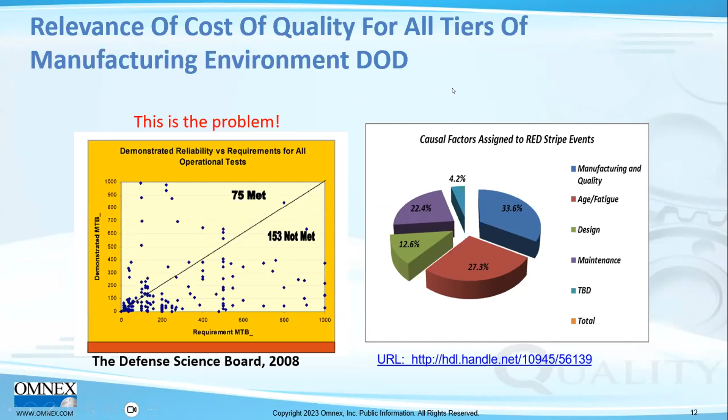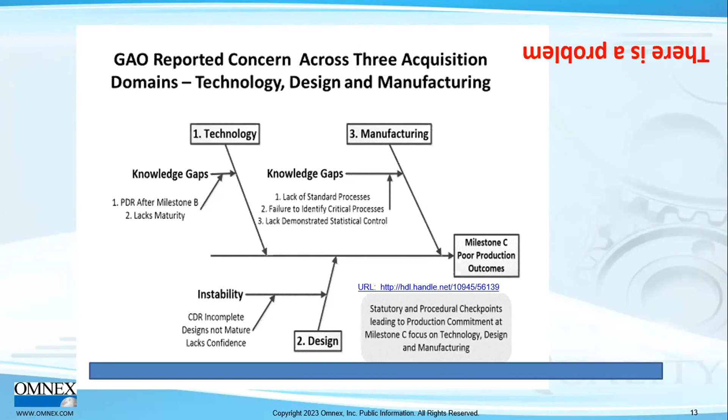It's just not mature. It's not data driven. It's a risk-evaluated system. So in my thesis, I decided to look at these three areas and focus on what's called knowledge point 3. You'll hear these terms if you're involved in contracts and in the product development cycle.

You may hear these KP1, 2, and 3 - they're metrics on how you look at the success of a program, trying to come up with metrics. And I focused on what makes the right approach to milestone C, a goal where you can start production with some know-how.

My findings, through working with at least 5 major defense primes and over 100 suppliers doing manufacturing readiness assessments, showed there was no eye on advanced quality planning or knowledge of the development of the production process.

We call that development cycle EMD, engineering and manufacturing development. But I challenge anyone - and you can email me back or try to reach me - is it the rule or is it the rarity that manufacturing development has knowledge that they can make more than 2 in a row, or run at rate and meet requirements?

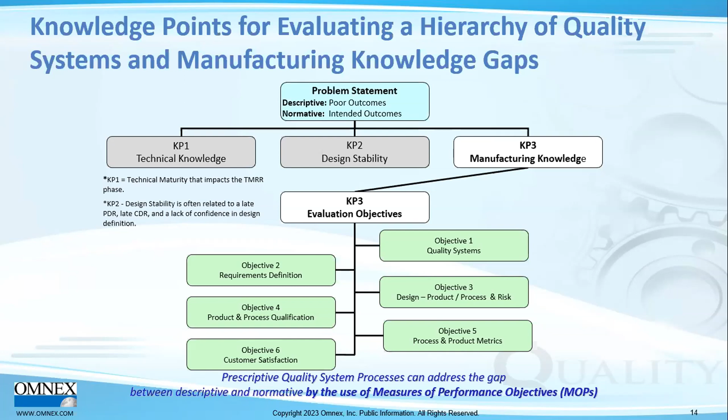What's on the horizon is the aerospace industry adopting the automotive industry approach to quality enhancement, trying to make changes when the needs are just a little bit different or the quantities are different. Rather than objections to doing this, it's how do you end up with a better approach to knowledge at KP3. A little chart here on what is KP3 according to the GAO.

Today, the criterion that the GAO is looking for when they measure your program - if you're high enough on the food chain of product development, you will notice that the GAO is assessing a product, or maybe your products are inside of the larger equipment that's being evaluated.

The GAO is looking for what they call manufacturing readiness level 9, which is equivalent to saying that they're using the aerospace standard 9145, and they have the knowledge that's generated through deliverables that are part of the PPAP process.

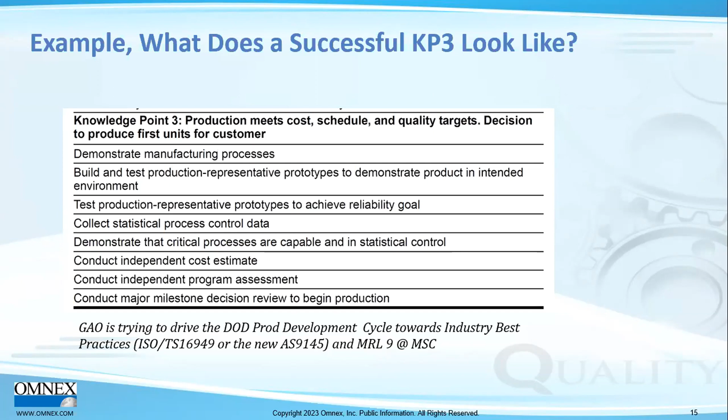A little more discussion from the GAO and what they say - this knowledge point 3, can you be ready? You have statistical evidence, and do you have an ability to demonstrate that you're hitting tolerances? Is the margin big? Are you looking at variability in some way? And I found universally that it was very difficult to come up with.

We all are familiar with first article inspections, and we rely upon that almost exclusively. But that's AS9102. AS9103 is saying control plan.

What should be the definition in your production process where you're taking data and looking at variability that's significant, such that if you're outside of the requirements of the variability of a particular critical characteristic, then it might affect the technical performance measures, or the KSAs, or the KPPs, and threaten the threshold of the success of the intended equipment.

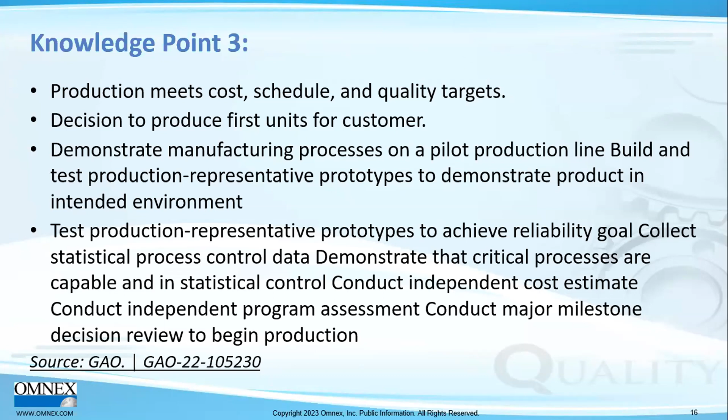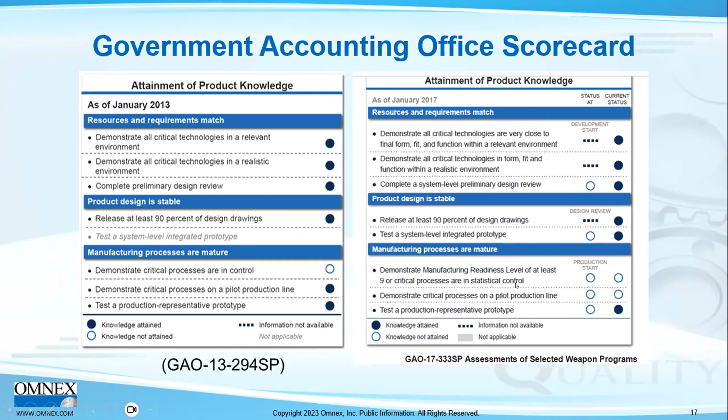That criteria change we're looking at may look minor, but it isn't, because it's really saying you ought to follow AS9145. It's kind of between the lines, because I sent my thesis to Gene Dodaro, the GAO lead director, and they changed their criteria to represent what I was writing about. So I take some credit, whether this is good or bad is to be seen, for influencing how they're measuring systems today.

So simply put, I'm on the committee to look at aerospace standards for the department, and I looked at these things as being unfriendly in AS9145, its current version and release, which was in 2016 when it was released. So it's in review.

2022-23, there's a change. We'll look at what the changes are and the impact. But I rewrote this and submitted it to the committee. I'm working with the DCMA, and they want this in all contracts, space and defense, so we're working together to do that. We're going to be at the committee in March of this year to suggest some of these changes about prevention, or moving things left, on this approach to getting knowledge for manufacturing and production readiness, under more robustness and more prescriptive guidance, which has kind of been shied away from.

We have the AS9145, and then we have the AS13145. I don't know if it's released yet, but it's the same thing. It's about what we want to do for advanced quality planning and production part approval process, kind of a missing link that all other industries do and the defense does not. That's what we're trying to move towards, or at least a certain community of us, to try to have more knowledge at production readiness.

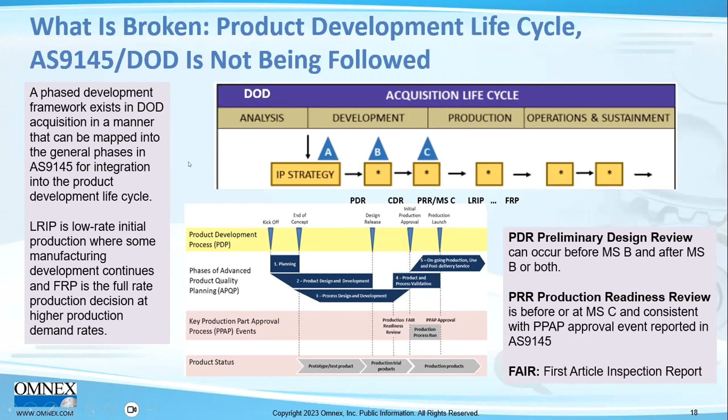What we want is to have this knowledge point 3, the desired realization of MRL 9. And what would that look like? What would it take to do? Is that a cost add or is it a cost reduction?

According to the Air Force, the head of manufacturing is the G23 committee. It's David Karr. He is the chairman for that committee, and his committee delivers the AS6500 standard for manufacturing planning, which has a lot of these best practices in it. APQP really is just best practices found in this document produced by the Air Force called Handbook 896.

And it's in revision right now, to follow more closely the AS6500 standard with the 896, and it's kind of married to the APQP as well. So we can see there's this mounting effort. And if you look at the top 5 prime contractors, maybe you're part of them, they're hiring directors of APQP and PPAP. So that's a need.

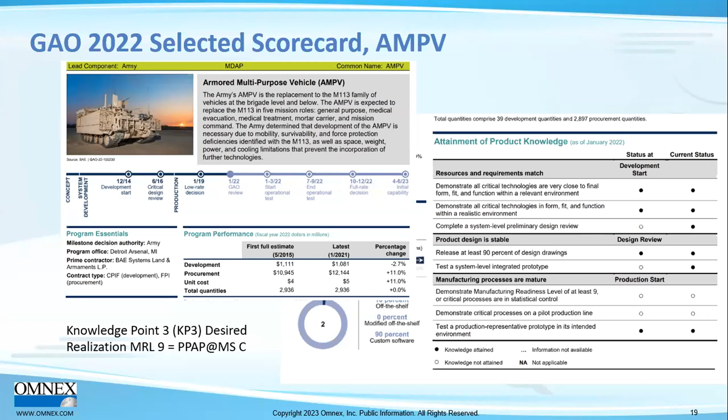I think soon the MRLs, manufacturing readiness levels, will be mapped into the deliverables of the APQP and having a production readiness. I think that's the direction we're all going. Yesterday, I was in a meeting with Crane here at the conference, and they're already doing PPAP and APQP as a standard. Of course, Omnex trains on those things, and I brought the defense side of things.

All right, sorry about that. So basically all the industries do this except the DoD, and we'll take a look at some of the numbers and what that means.

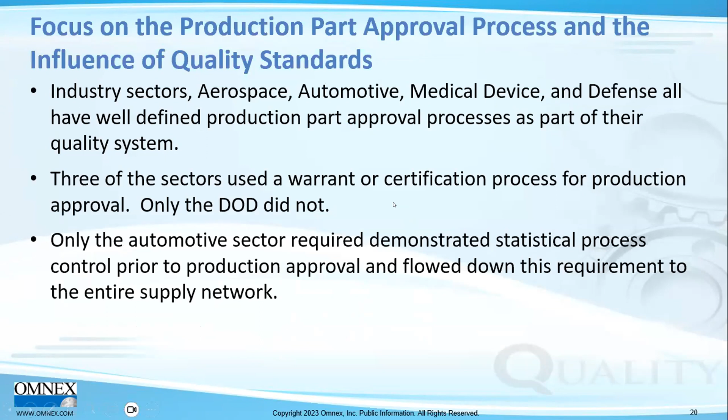So I studied these industries: aerospace, automotive, medical, and DoD, and I looked at just the 3 largest contractors, since that data is readily available, how many employees are involved, the scale of revenue, and in some cases there was export, though I didn't have export data for these industries. So they're scalable. All those things represent a lot of people and a lot of effort.

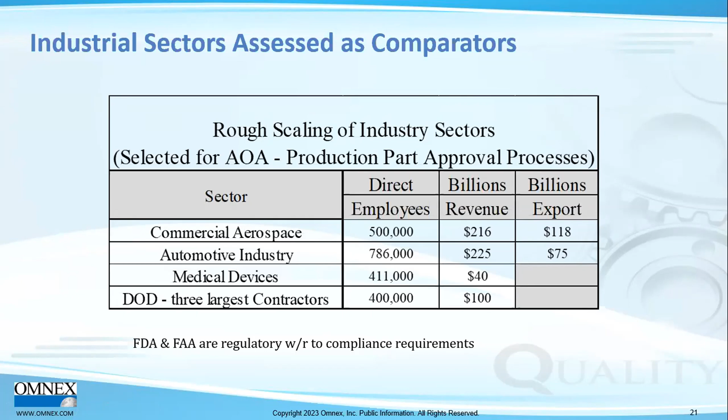And then I looked at something, and I'm going to try to parse this into two pieces. So the top one is before there was AS9100, and before that there was ISO 9000, 9001, and then the automobile industry called it QS9000.

And there was an organization, AIAG, and the ASQ, that did a survey 10 years after the introduction of this standard. The significance of this standard is essentially saying APQP, it's essentially AS9145. And it asked, did quality improve?

They're asking 800 companies or 1,100 companies in the ISO, who followed ISO and who followed the more prescriptive QS9000 approach to things. And the QS9000, or prescriptive approach, showed the supply chain had a dramatic improvement in quality and in reliability. In the ISO group, it was hard to find that anybody said ISO helped us, but we had to be ISO in order to play.

And in that, so McGraw-Hill carried out that investigation, and the ASQ and the AIAG carried out the other investigation. Statistically, I put together a chart to say, is there a benefit to following one or the other, and why? And the numbers are the why.

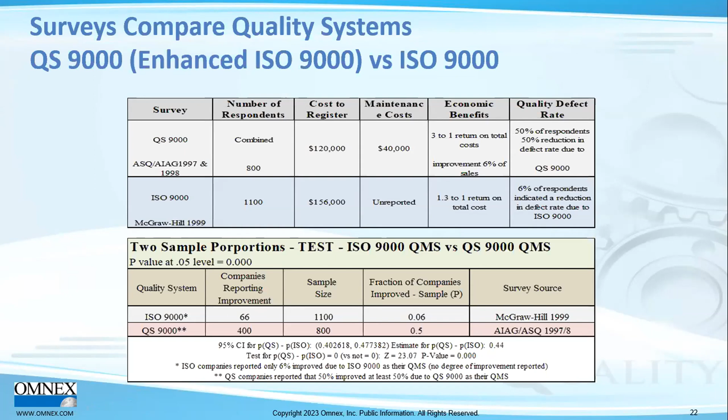The improvement was 50% of the time there was an improvement, and 6% of the time there was an improvement. Oh well, really, it was 50% of the time there was at least 50% improvement. I mean, it was just dramatic if you followed the prescriptive approach, something more like APQP.

All right, so the QS9000 morphed into something that was called ISO TS, Technical Spec 16949. It's actually in the FAR, the regulations for doing contracting, and this is the TS spec. The 16949 is actually in there for a higher level quality standard that one could follow, but nobody ever assigned that one. They really, I'm going back in time because it's level D for AS9100 here, but level C had these things when I did my thesis.

That they had a customer specific clause, and you could assign APQP guidelines. You could assign PPAP requirements as a higher quality standard for contracts that had more complexity, and you could have statistical requirements put in here, but they didn't. They just were happy to have AS9100 compliance put in a contract for DoD. But really, to dig further, and you want the benefit, if you want higher quality, it's this more prescriptive approach.

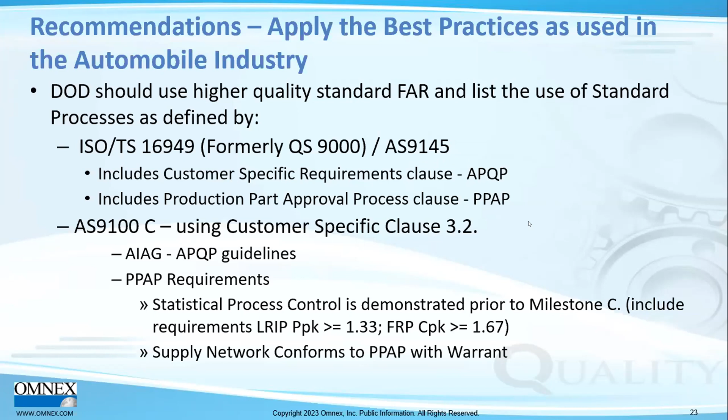And AS9145 is bringing that to the front. So I have a graphic here, and I'm going to go back and forth between the two. But this is the product development cycle in the defense industry: technical readiness on the one hand, and manufacturing readiness on the other hand.

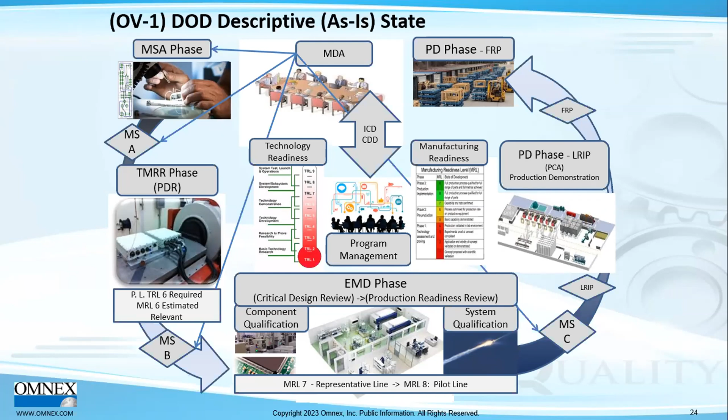And the technical readiness has laws associated if you're an ACAT-1 program, and that you must be at least a TRL 6 to enter engineering and manufacturing development. And I take a look at this, and this is what I'll call the current state. Where we're going is this change here. Now I'm going back and forth on the slide to kind of show what's changing.

And the red is that we should apply APQP and PPAP for component qualification and system qualification. We should add the production, essentially having a production qualification. And then when you're really ready to launch, you have some data and you have a PPAP, which is a warrant statement. I have a white paper that I've done on what is the procedure for having a warrant statement for when you do things, because there are three areas that happen.

It's a different topic, but it's how do you say that I'm ready to produce, and you have a handshake process and deliverables that show you're ready.

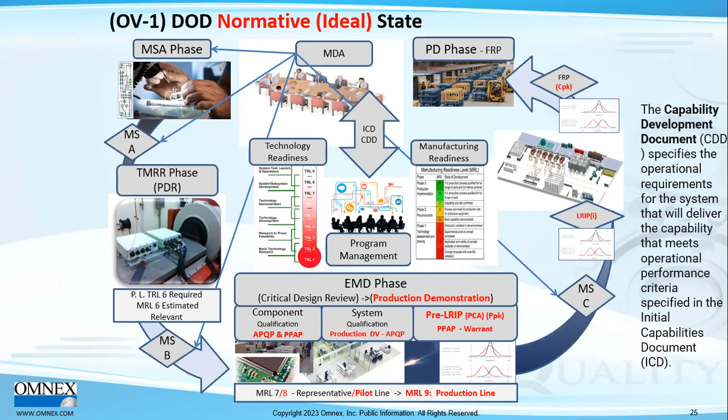All right, so this kind of brings us down to the end a little bit here, and we'll let the next couple slides show insights for the government on how to improve. So if you're an agency, the Army, the Air Force, the Navy, and you're OSD, and you're trying to do contracts for defense.

Clearly state requirements. You can have SD15, which is a systems engineering requirements definition document. You can Google it at SD15, and you can show that you can make specifications for manufacturing. And even though they kind of don't do it, you can do it, but I don't fund them. So could we write clear requirements for manufacturing readiness?

Can we have a DID, a data item description, and a CDRL defined? So I'm defining a family of them that we're going to put into the ASSIST database, which you may be familiar with, where contracts can pull these DIDs into the contract that will follow AS9103, or AS6500 already has one in there, which is manufacturing plan.

These are the knowledge gateways. AS9145 is the one I'm developing with DCMA, and then we're going to try to put that into, make it available as the data item description. So it kind of gives you the how-to, the content, the format, the sequence, the time to make these deliverables more objective and prescriptive. I think there's a role for incentive contracting, because there are a lot of objections sometimes.

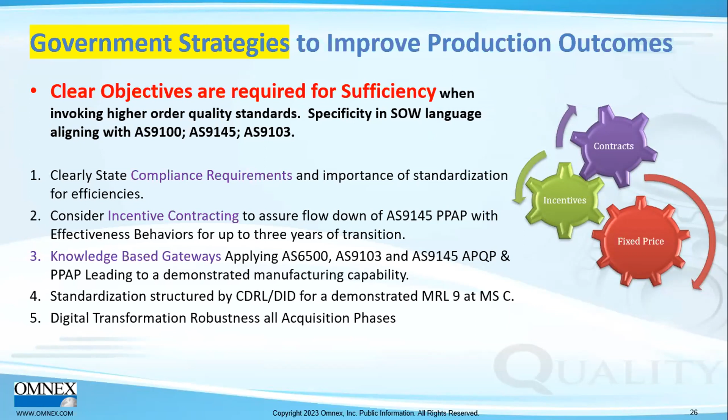And if you're doing this APQP—like Boeing and Raytheon are all hiring APQP directors, I suspect there'll be managers and workers on this too. So I think they see it's coming.

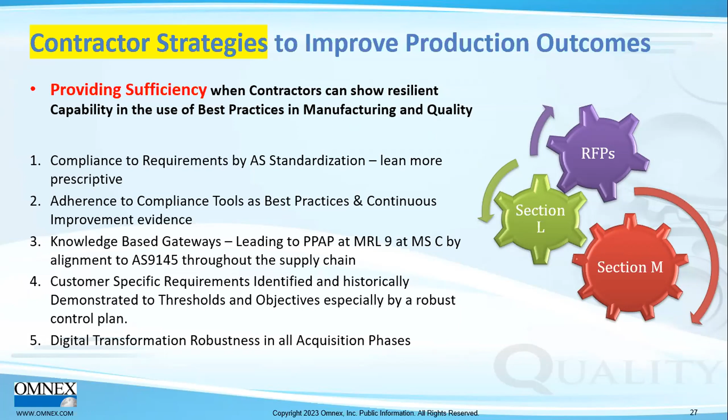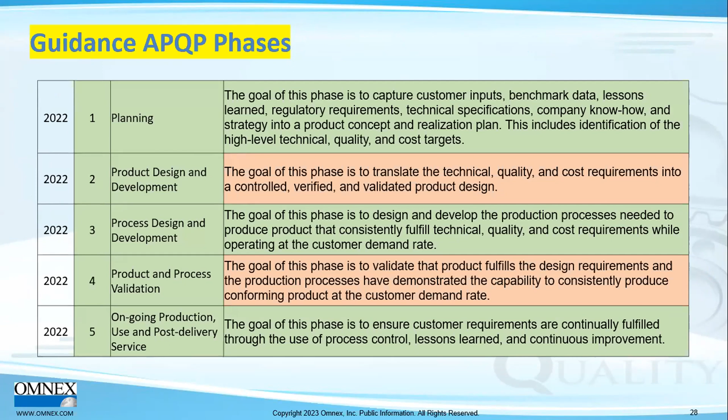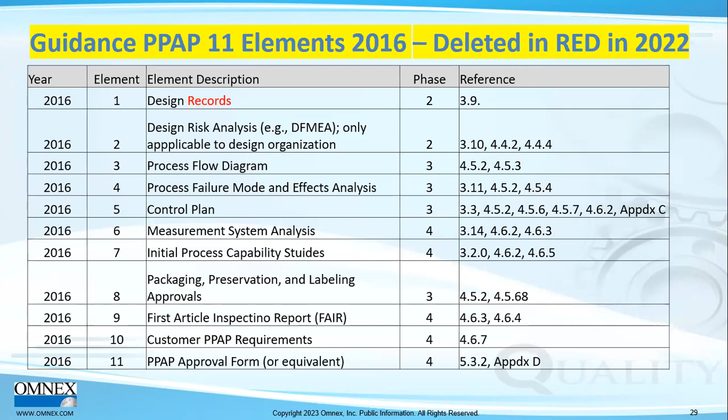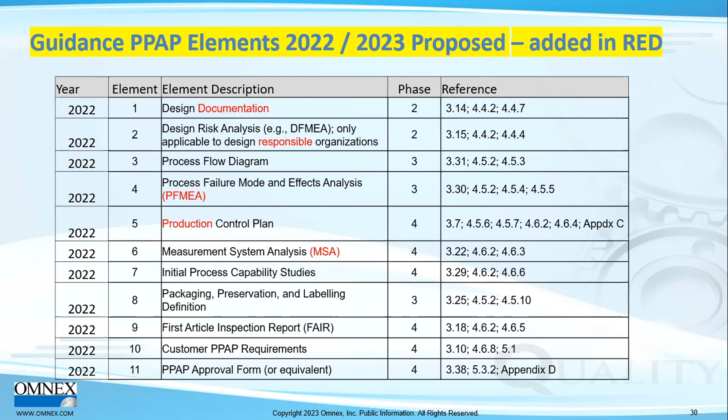These are just the phases in the APQP phases. I say 2022 because it's not released—I thought it'd be released by now, but these are some of the goals stated by phase. This shows that in 2016, which is the current PPAP 11 elements, they're deleting the word 'records' in the current one. It used to say records, and in the pending version, they use the word 'documentation' instead. Small changes, but maybe significant. They've also added PFMEA or production control plan, not just control plan. But really that's AS9145 or more enhanced, and it shows how this future one that's anticipated will be coming out.

The status of things—we can open up to questions if there are any—is that changes are taking place now in each of these standards, these consensus standards. I think they're all going in the right direction. I think they do need to be more prescriptive, especially the engine community, which is really dynamic, and they have the AS13000 series. They're bringing a lot to the party, and I like their enthusiasm, but I don't like the proliferation of standards for APQP and PPAP.

All right, so kind of coming full circle, we have training that we want to do. I think Miles may have talked about that in these different areas, and the courses that we offer and consulting. I hope this was an informative seminar for you. It's directionally someplace we're going. There's a lot of facets to this to make it the best it can be for you. And if your company is looking at this, we hope we can help you.